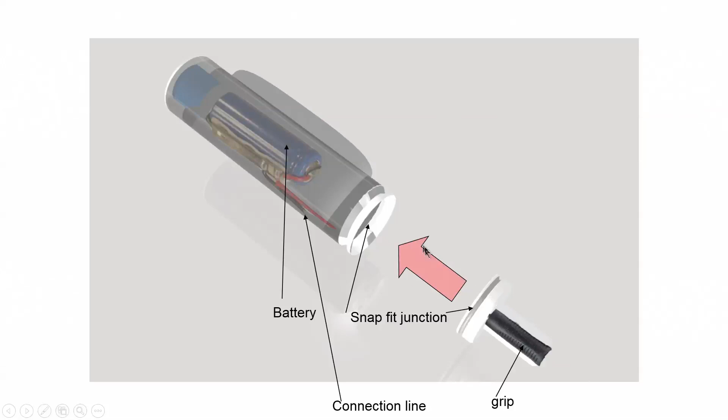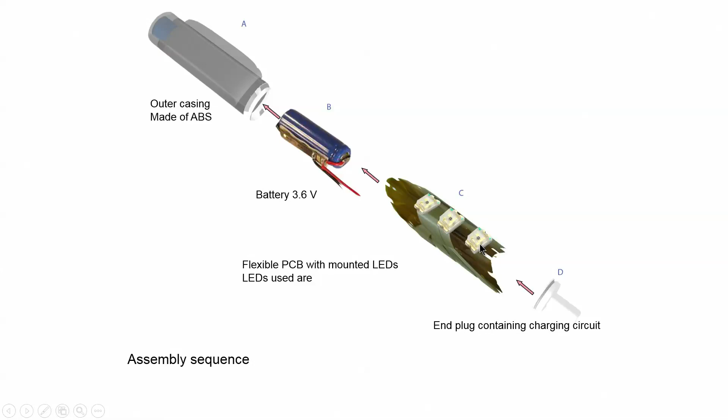Now, you see here a lot of this detail has been carefully worked out, and eventually we have the 3.6 volt battery, then we have an outer casing of ABS, then we have all the necessary electronics inside, and finally this is the product.

I will stop here. Now, I will try to get back to how to start actually making a model. Yeah, you have a look here. One of the first things you will notice is it has been started with the very basic unit. As I said, it is meant for a battery holder. On the right side, I tried to create a battery.

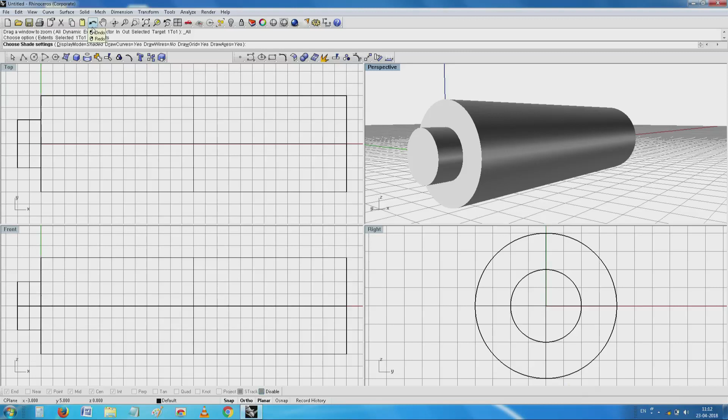See, I start with a cylinder which typically represents the length of the main cell, and then at the end of it we also have a small cap. See this? So, if you see here, this is how probably it is going to look.

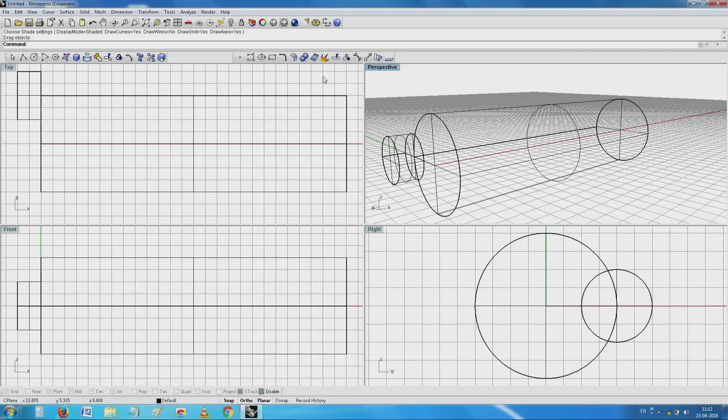Now, only problem is, please put up with it because you need to learn a little bit of that solid modeling also. You see here, now this thing funnily it has moved off. I did not want it to move off like this. When I want to do any orientation or anything, it should not move off like that. Logically it should sit back where it was.

So, I go here and by using normal techniques, I do what is called a simple union of these two objects.

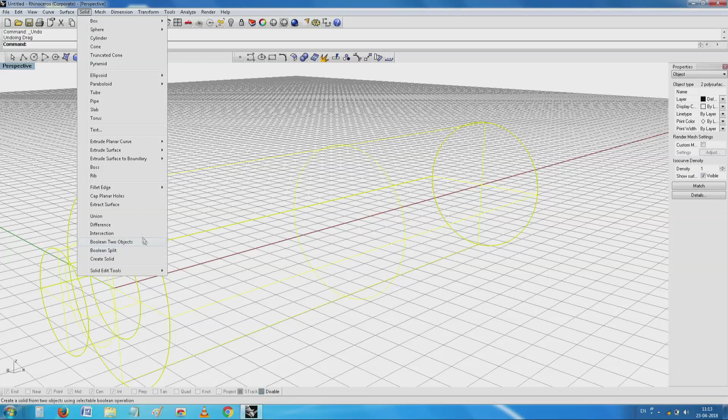I understand some of you are very much familiar with these things. We can also join them together, or instead of uniting them, attach each one into a group, which is called group and ungroup. In some conditions it is valid.

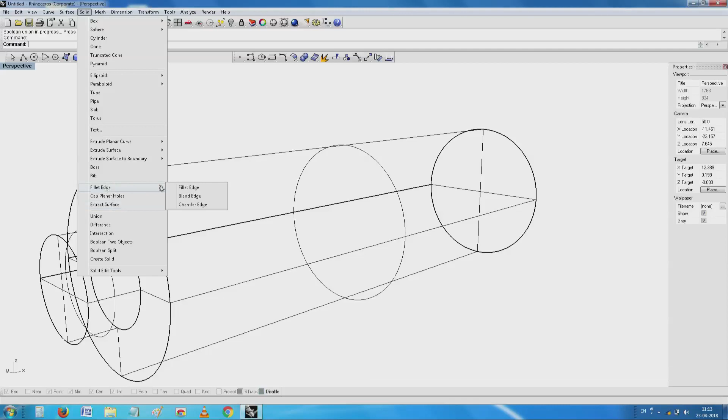In this case, since this is an object that needs some important things like a chamfer here, I'll see what I can do using this solid chamfer command. I'm sorry, fillet edge command. I'll see if I can just fillet it. Done. Same here. Done.

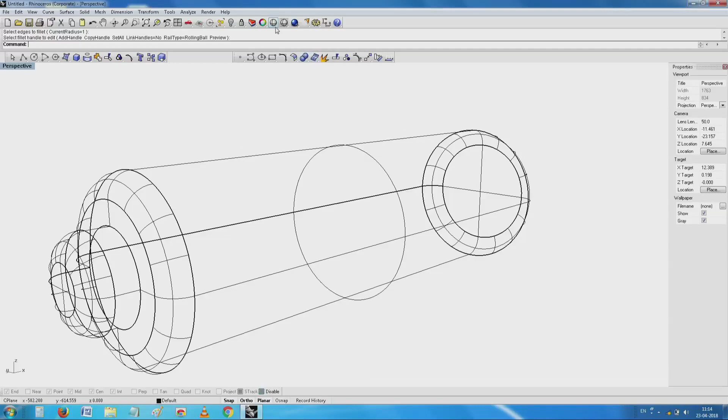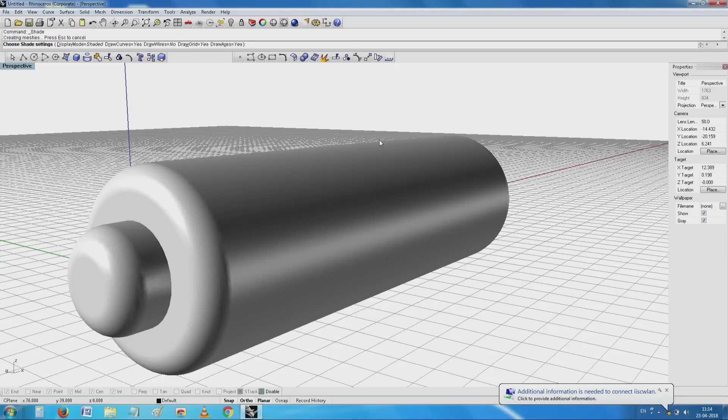Now it starts looking a little like that cell which I wanted to make. Right now I've done it just off the cuff. I'm not taking too many dimensions, not doing that associativity with it. This isn't even part of the actual device I wanted to make, but I need it a lot so I should know how to proceed beyond these things.

Now once more, depending on the voltage, depending on the number of contacts I require, you see here I have two contacts and something else also at the back here. If I now concentrate on the two contacts...

Let's say this is one polarity, and now we end up with a very peculiar situation. So I have a torch cell, let's say for the moment the top is positive and the bottom is negative. Next one, it's customary for us to invert it. If we invert it, positive negative to positive, and positive will come here.

Now comes the third thing. I'm sorry, positive negative comes here. If I'm to take connections from the top, it is easy. Now let's say I need to add one more to make that 3.6 volts, it ends up on the other side. If I wanted one more in this orientation, where you put the spring contacts becomes very critical.

So in this case, for various practical purposes I suppose, they have made this. So luckily for me, invariably this will be a positive contact, negative joins to positive, again negative joins to positive, it goes like this, and finally I have... can I get both of them on the same side?

You see here, now I have one cell in place. This is where the advantage of using CAD will come. So what I'll do is copy one with the other.

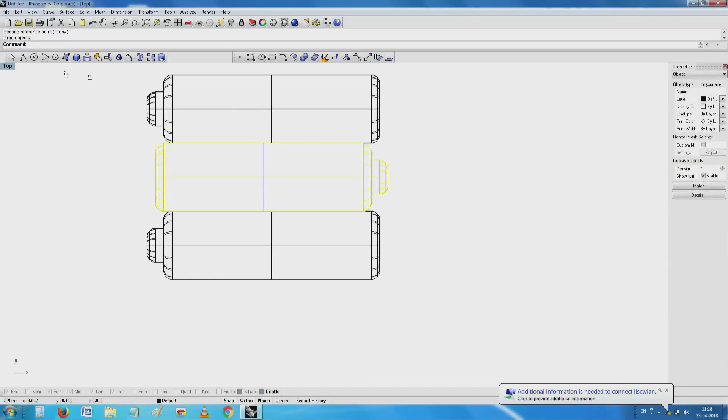Now, if you look at it in the other view, without too much effort, you have seen...

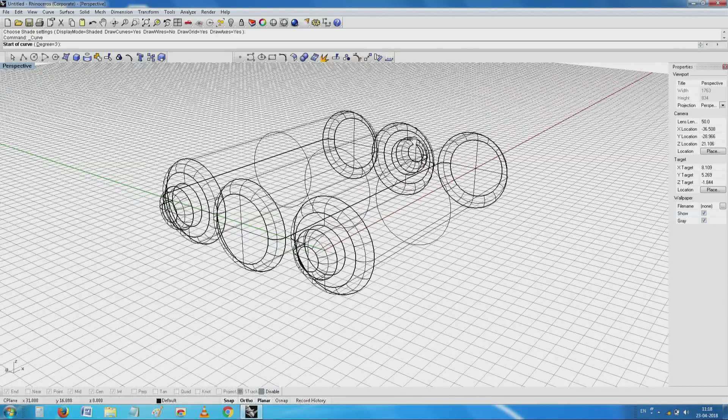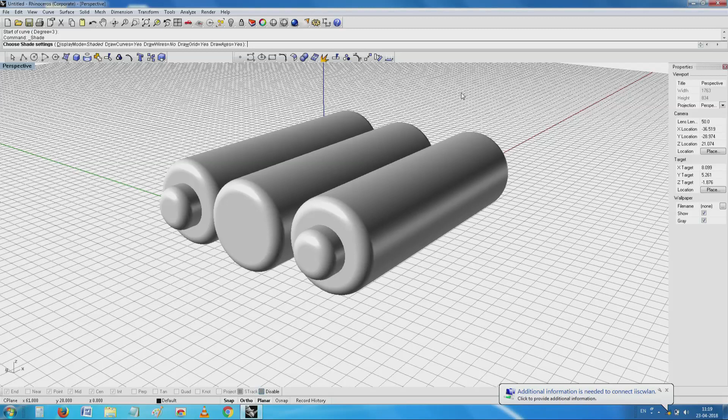I have created 3 cells, and where the connection is easy, it's relatively easy. But then we come to the other problem, saying both the positives have ended up here. Now how to deal with it, that's where the thing comes in. But right now, to just move on with it, I'll see how best we can make things here.

I have all the cells in one place. Now I need to start building the cover as I would like, a little similar to what I have seen.

And why it is or anything, no, it is about how well a thing like this can be introduced inside. Earlier what people used to do is try to make a mock-up using polystyrene or even acrylic parts, assemble together and try it.

But right now, thanks to rapid prototyping, we can still afford to do a few mistakes, 1 or 2 small mistakes. So one of the things you will notice here is whatever partition I want to make and how much gap I can see. Right now I have a beautiful place here where I can start.

See, 2 small, rather 3 small structures have been created here. There is a little advantage and disadvantage. Advantage is without too much effort, I could just trace something on the screen and create these objects.

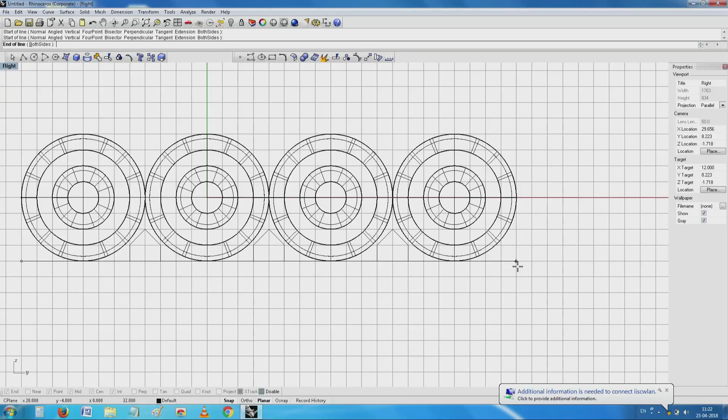Now we will come to the next important thing, saying can we create a simple base using these objects here. That is the starting point. For convenience,

I have created a section which is about 1 mm wide. It is more a matter of convenience, nothing to do with other things. Now you see how I will try to attach these things to that. I will use a command.

Right now, this is not a command on how to create these things, that, as I have explained to you earlier, you can try to. You see here all of these have been attached together like this, and now I will go for the next thing.

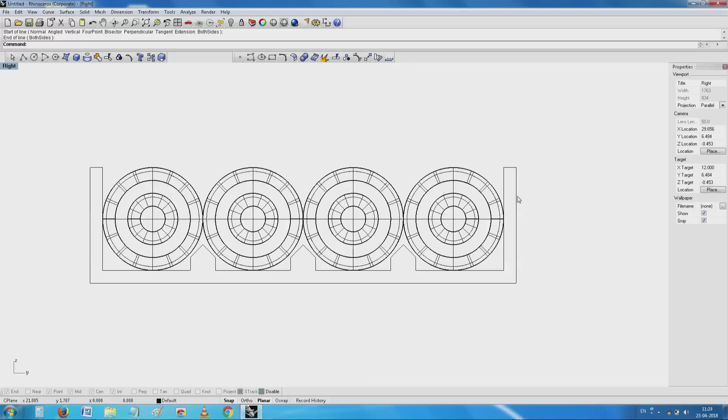Having created this tray-like thing, which forms part of the base here, you have seen this, it forms part of the base here, base that you see here. This is a cross section which I have created right now.

So instead of these things with all this slope and all that, to make it a little faster, I have just created something which is straight, and these also have created something which is straight. Now what I will do is hide these cylindrical batteries here.

Attach all these things together by a command called join.

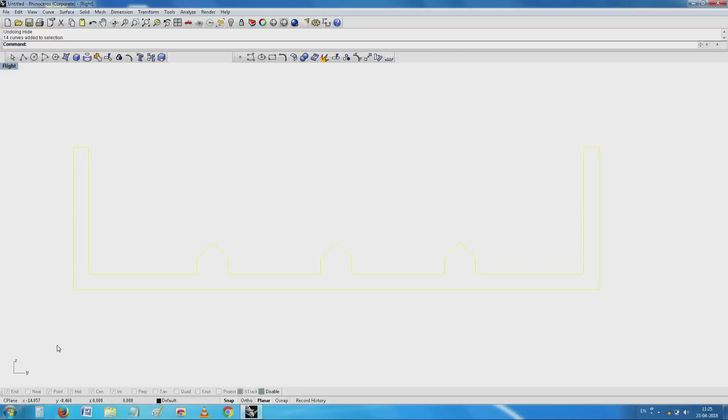See, I have got a single line which looks like this. In a way, I am a little happy now. Let me look at it in the other views. You have seen this. And all I need to do now is go to something which creates a solid here.

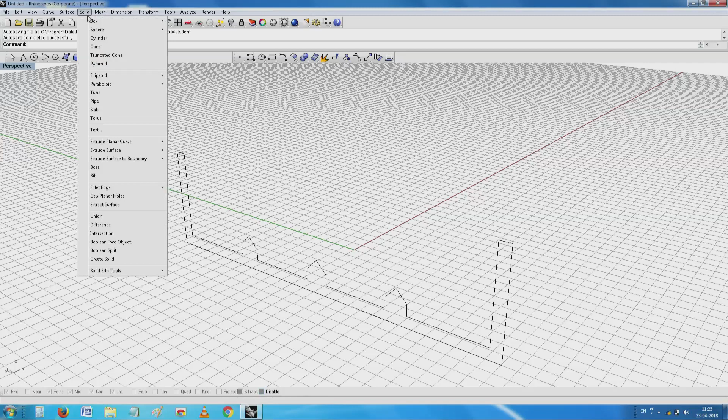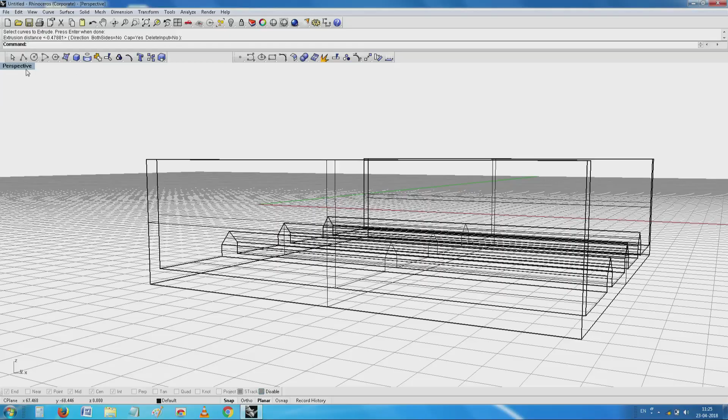See, already part of my box is ready. You will notice that so far it was just about creating a box. There is no big deal about it. I have started with these cells which I managed to hide.

Now I will try to unhide the cells which are there. Now I need to think about how well do they sit together and do I need anything more. And one thing why I have stopped here is

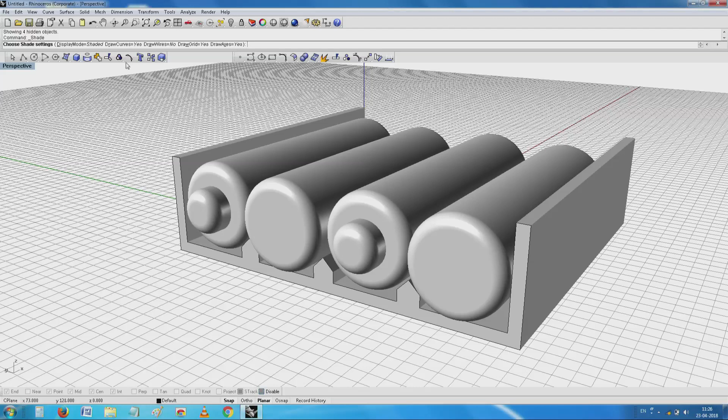now we have several options on how to lay up this device. One of the things you will notice is this is vertical and relatively tall. Will it be strong enough? That is where we started in the beginning.

So if you can kindly have a look at my box here. We started like this, then we thought, going by the manufacturer's specifications, we thought this is okay. I mean, because he said something about 1 mm, 2 mm and all that. Then we discovered that it is not that okay as we think it is.

You see, it has developed holes because we have to be a little more careful about the numbers we choose and the algorithm the machine itself follows inside. And while that was clear, we

overestimated the support required for putting this small threaded insert into this. Too much dust here, old, 5 or 6 years. Now this is where you probably require a little bit of tips and tricks, and then somebody else also working with it.

Now going back to this, now you decide is this optimum, making things like this, or do we have a little advantage and disadvantage.

So if you see here, if you see this view, the machine is going to build things like this vertically. First layer will start here, okay, something will move like this.

After coming here, the algorithm decides whether it should move backwards and forwards or what to do, and then how do we build up these things. This is where the total amount of material we need to save becomes important.

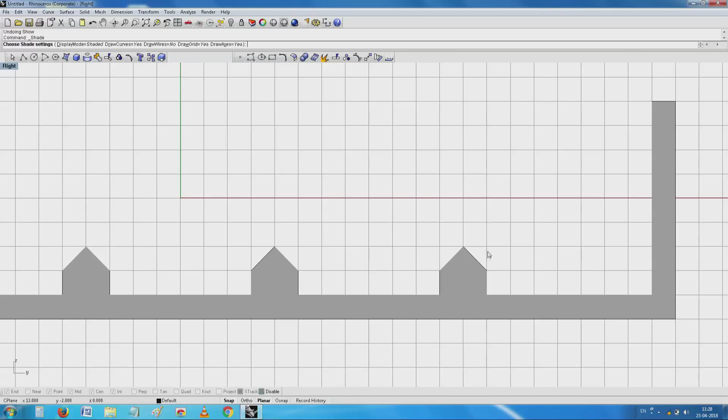If you put it in this condition, it will behave in one way. If you put it upside down, it will behave another way. And will it be stiff enough? What about this profile? Is it sufficient for us? Can it really be a triangle? In reality, it will never be a triangle.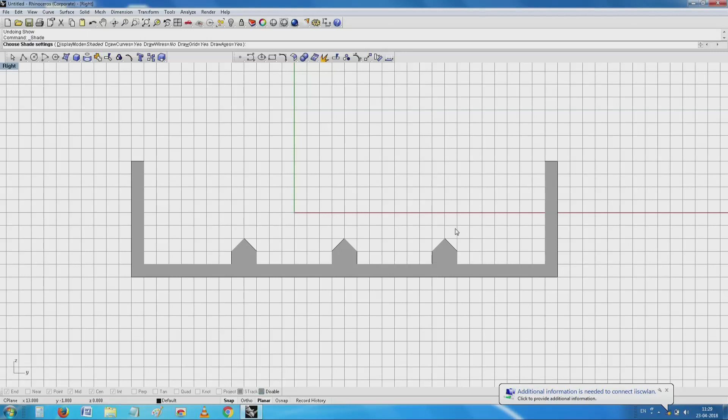You cannot make an inclined surface if you put it like this, because it depends on the layer thickness. The issue here is the layer thickness, not the XY resolution of the movement. XY resolution is one thing, layer thickness is something else. And again, in layer thickness, the way it handles the layer is one more thickness.

So, it is very easy for me to complete this job here, which is actually where our main problem starts. It is easy for me to create an end cap at this point, in fact probably the easiest of all these things. What I do is try to create a surface, a plane, corner to corner.

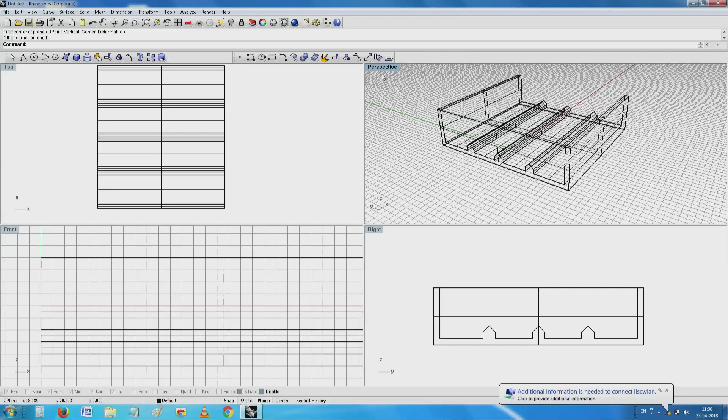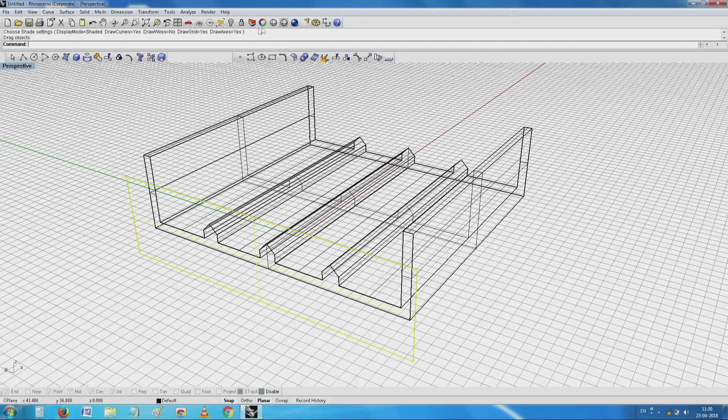So, I have an end cap already. Unlike in regular sheet metal or other plastic construction, we need not worry too much about whether it overlaps there. I will just move it out a little, and you see here this seems to be, I have two options. I can make it sit within this thickness from here to here, or I can make it sit over the thickness here, depending on your method of assembly or how you want it. All of these are possible.

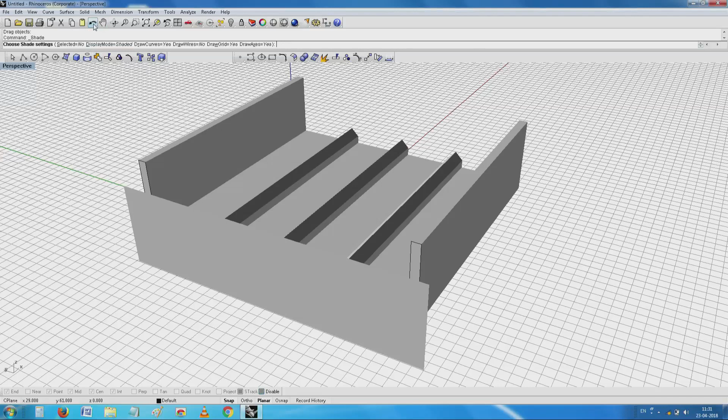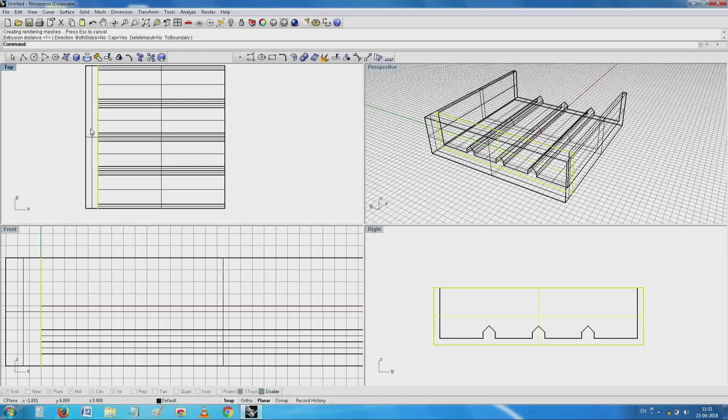And finally, the ultimate, we now need to give a thickness to this. I will just go here and try to give a thickness randomly. Well, it is as easy as that.

I have created a tray-like thing, I have added end caps. Now, you will notice that these end caps, by some lucky accident, appear to be a little thicker than the other things. Why do I need them thicker? Because I need to add all these details which are here. See, I have two contacts here.

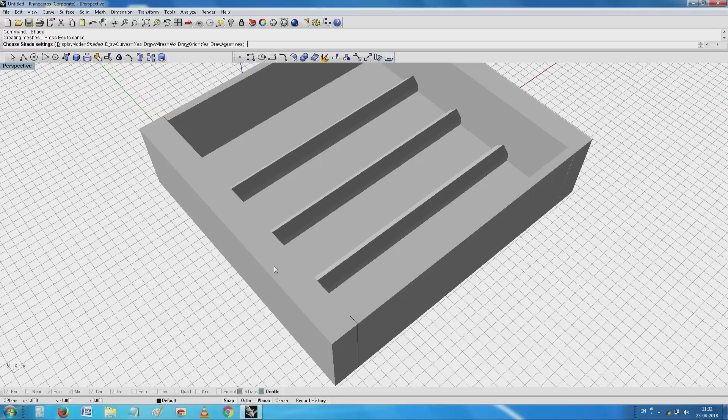Okay, then I have springs here. So, those things are very easy for me to create. I will go to the side view here and try to create a small circle.

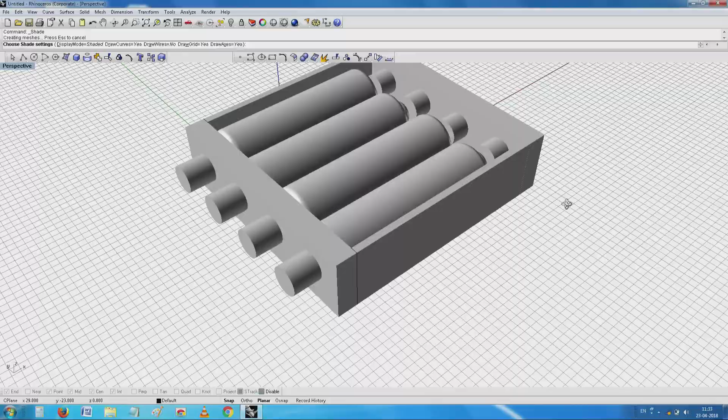See, I have those peculiar things, small knobs or contacts stuck here inside like this. In this case they are on the inside, in this case they are on the outside, just to illustrate some point.

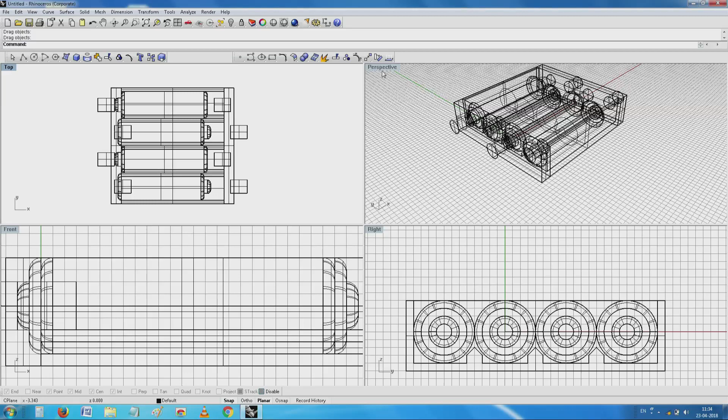If we were to follow that old thing which I was telling you earlier, now you see I have intentionally staggered them.

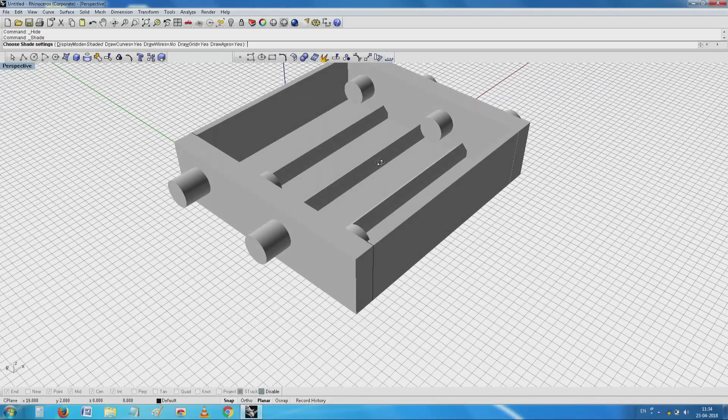Now I will try to do the Boolean operation one more time, and then you will probably now understand why.

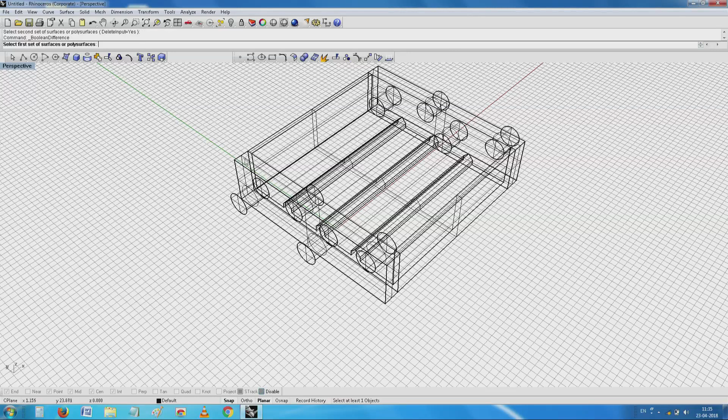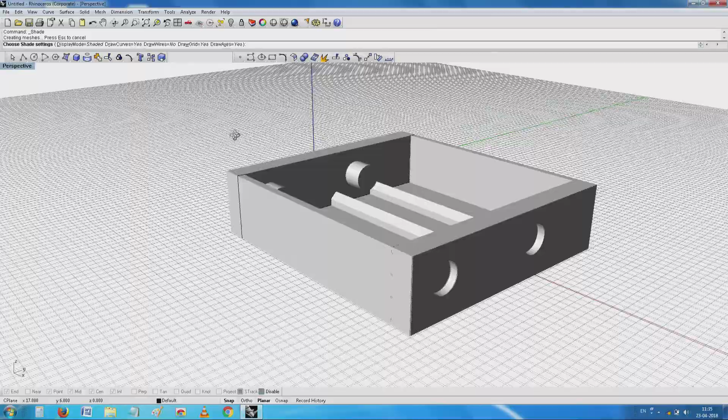See here, a dent has been created on the outside. You have seen this, these two represent the dents that have been created on the outside where the connections have to come. Now for this...

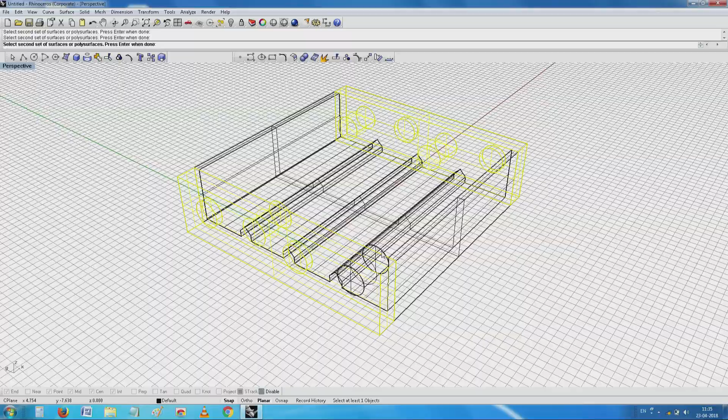Sorry, some problem because of what I call, I expect some software issue. I will try one more time.

Yeah, this has come out better.

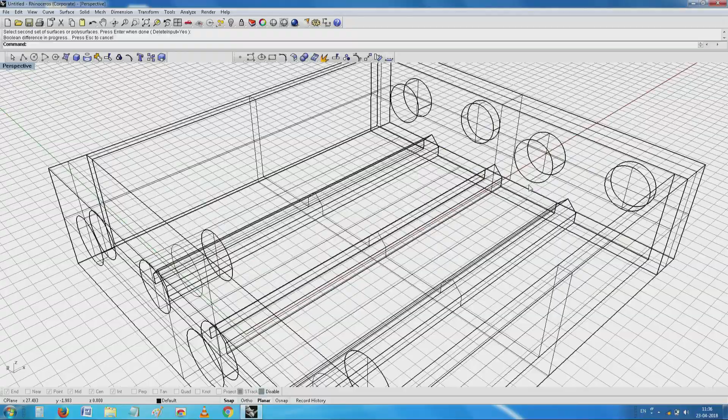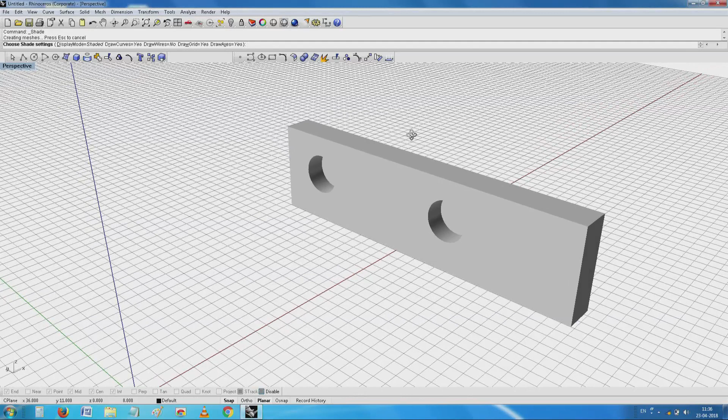If you see this, two of these indents have been made inside, the other two indents have been made outside. So this was the intention for me in creating this here. This is where a little more thought has to be put into what we want to do.

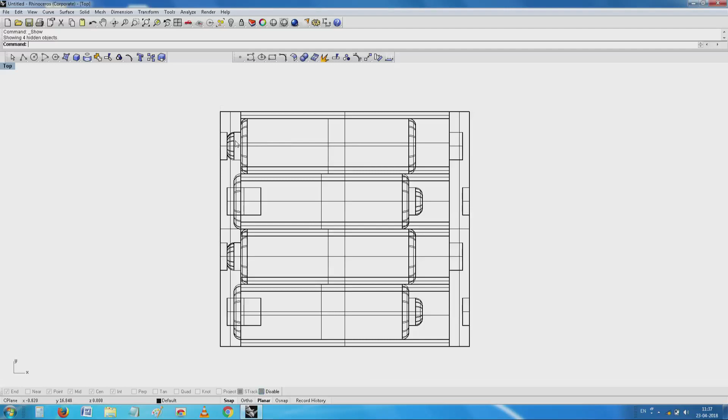Now, if I want to put all of them back again here, you see this is where the advantage lies for me. Since there is a spring here and you can have effort to have a contact, this goes forward, these two need to be moved to the other side. Contact here, spring there at the back.

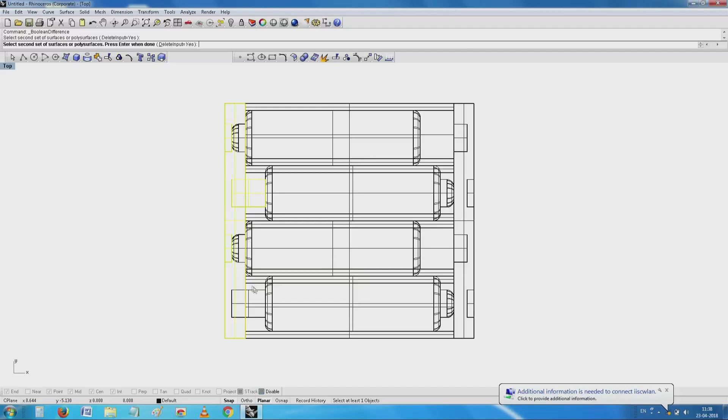I am luckier this time.

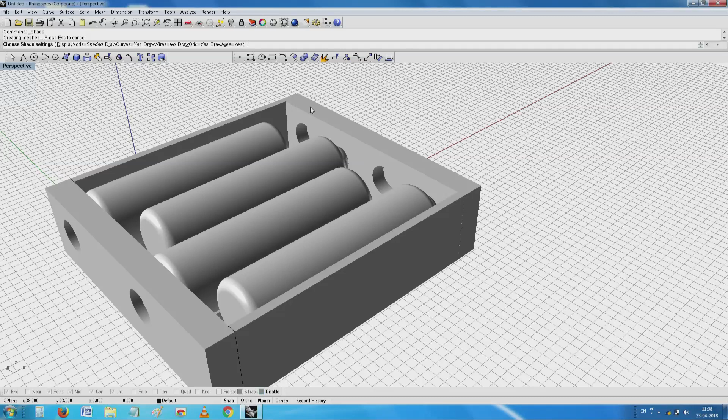My object is practically ready. Like you, I am also very eager to get it printed, but suddenly I noticed that the detail is not really matching. This is far more detailed than the relatively simplistic thing which I have created, that only had some indents, something up closed here, some little partition. This is already available in the market, highly evolved and suitable for injection molding.

Then you want to build it up for rapid prototyping. Some of these things are not so easy to do, including this curved surface, but that curved surface is required for it to be held in place. So how do you go about it? This is where that element of product design is also required. Now I will just try to quickly see what best I can do, because I think you need to go back and try it yourself.

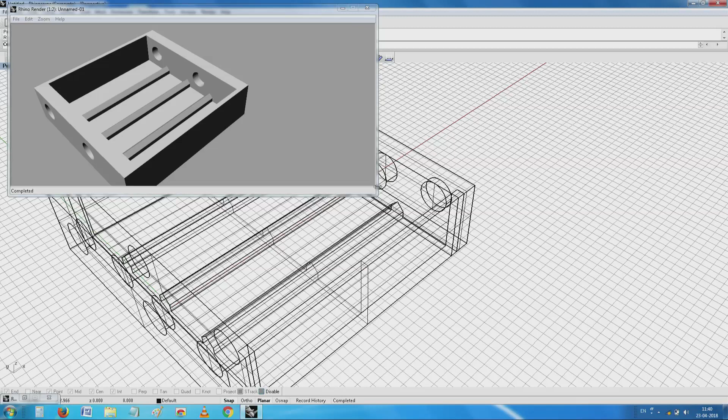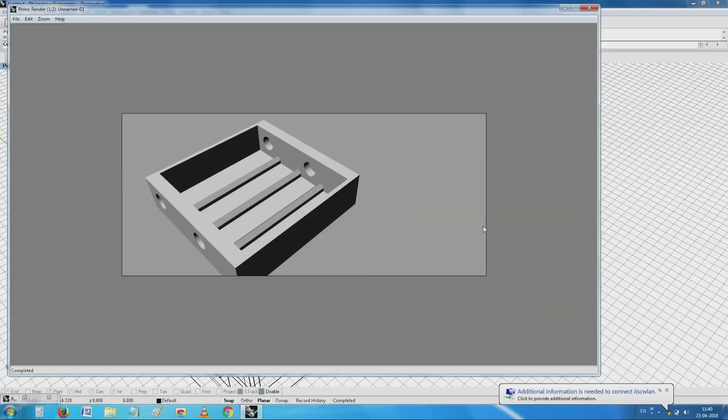I have my object ready, all ready to be printed. The advantage of solid modeling is, after looking at it, even the first time, you can go ahead and print it, but I see that it needs tremendous refinement, especially with respect to the other metallic things which have to go into the product. So even a routine thing like this has some slider like thing here, something else here, and there is a switch here, a switch top. You have seen this, I have a switch top. These things you can both integrate as well as take it from here.

Now you see here, for the cells to be pushed inside, a lot of detailing has gone in. This is a toy. This whole thing probably would have been produced for about 20 cents. It is cheap. By our standards, 20 cents, one-fifth of 60, is around 10 rupees. This whole thing, including probably all the electronics inside, has been made for about 10 rupees. This is where it is possible for you to optimize by going back to the model.

I will just now see one small, very minor thing. I will see if I can make the improvement, and then I will try to make it simple and fast.

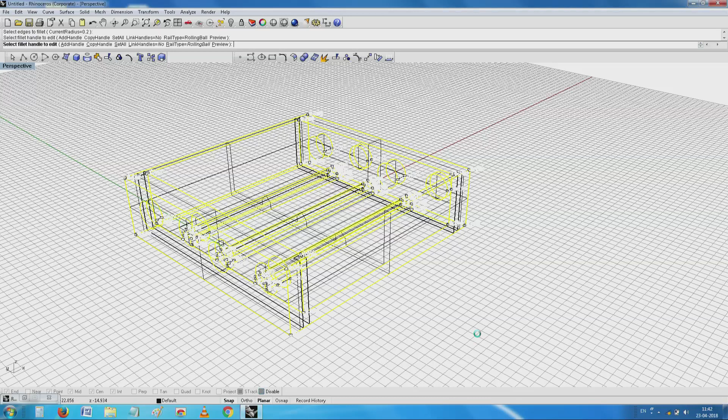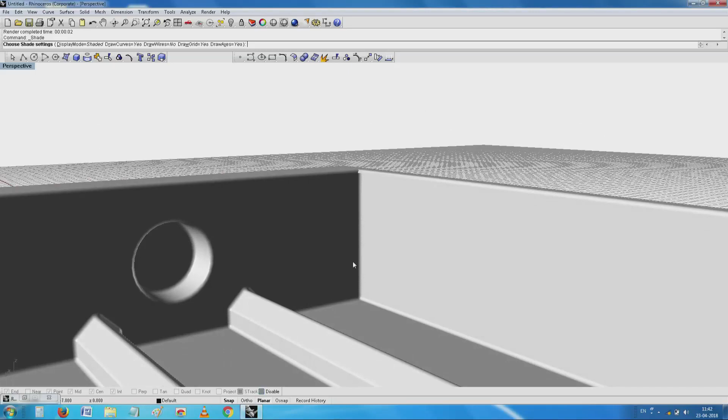Lucky again. You see, all the sharp corners have been removed. You see here, and this actually starts looking a little more like the real life model. You see the corner, and you see here what happens to the corner.

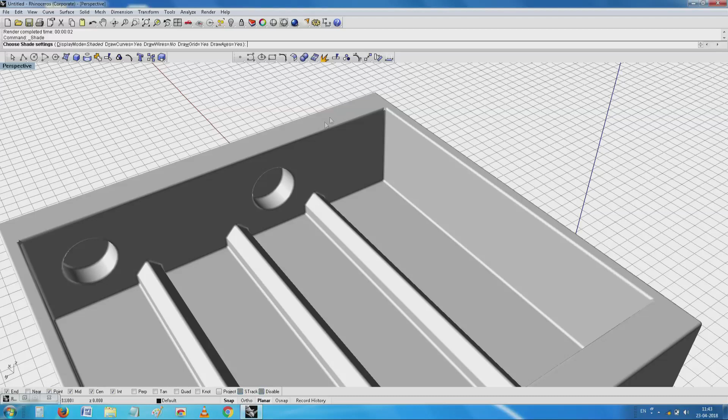Now comes where your ingenuity and various other things will come in. Once again, have you noticed this face is thin, looks fragile but serves the purpose. This has intentionally been made three times as thick, because this is where the force of all the electrical contacts and all come. This is incidental, just to see that it does not roll about, and to minimize the material we can do whatever we want.

Other options are also there. Do you need to make it like this, or can you give some curved, half circular things by which it can sit inside? And finally, is it possible for us to make, like before, two halves? Luckily, in the case of rapid prototyping, optimizing by making two identical halves and joining them together does not arise here. It is a question of, can we open it, load our items and push it inside, which was not possible earlier, which is very much possible now for us.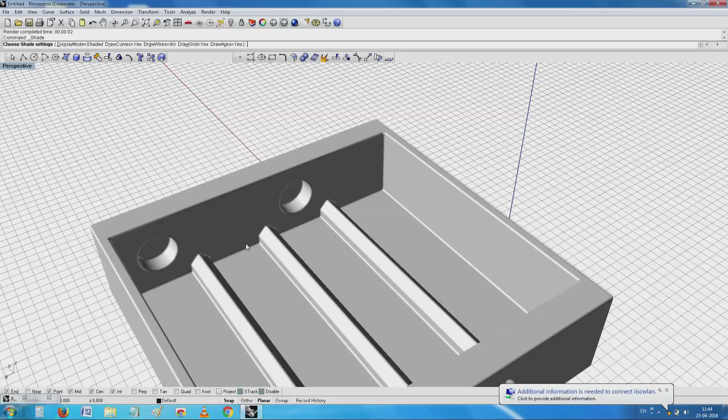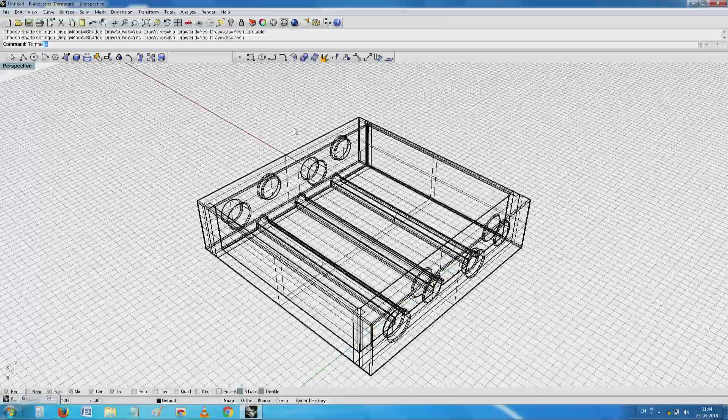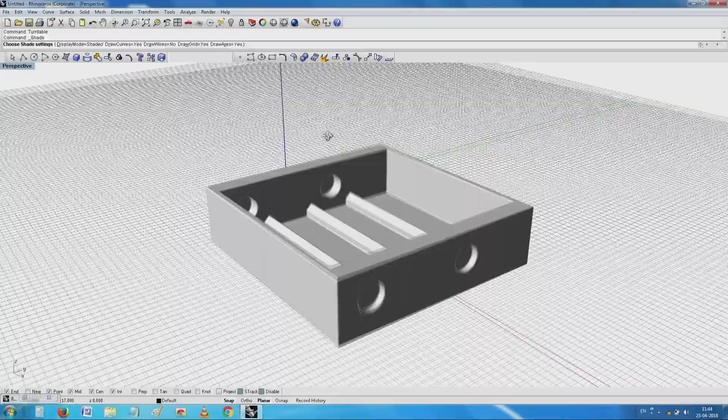So at this point I will try to stop here and see whether... you see here we have options. Right now by default it is moving at a particular speed. So after you become a little more experienced, it is very much possible for you to play around and see everything that is possible.

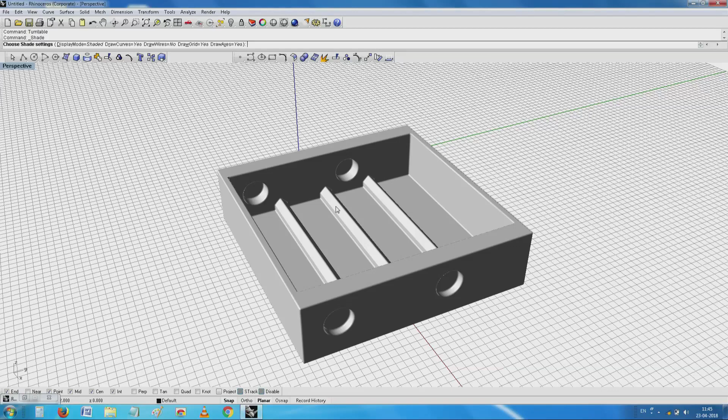Would you like to keep it like this? This is where the difference between injection molding and our thing comes here. Whenever there is a change in cross section, injection molding has chances of shrinkage occurring on the other surface. Right now I will see as best I can, tilt it towards it.

Can you see at this point? Now you can see some grooves like thing here, groove. One groove, two groove, three grooves. These grooves typically are the result of change of cross section here. We need not worry about it in rapid prototyping. The other face, because it starts by laying up, will look absolutely as clear as possible. And in fact, we can add any other texture, preferably with small dents and all that.

So permit me to stop here, so far now what we have come. I will continue with this in the next, what I call, half an hour. So, thank you.